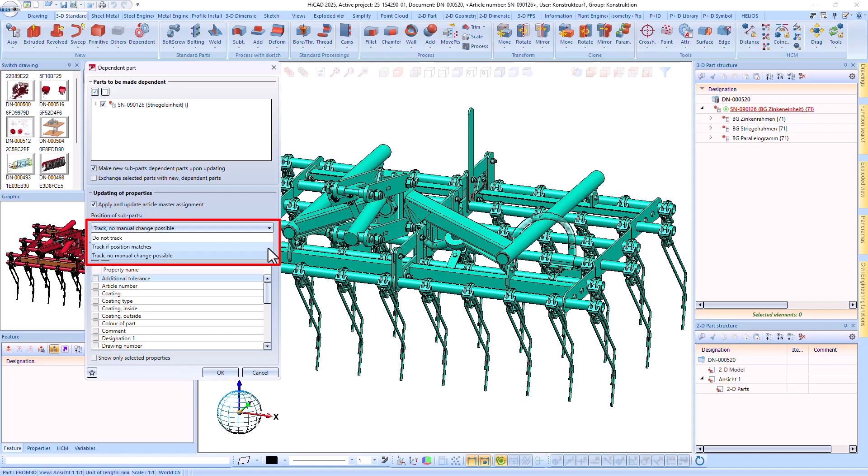When working with dependent parts from assemblies, the previous option track geometrical position of subparts has been extended. In addition to the familiar options, do not track and track if position matches, there is now a new setting, track, no manual change possible. This ensures that the subparts remain in their position and are reset if required when a manual change is attempted.

Previously, it was also possible to change the part structure of dependent assemblies. These changes are now generally prevented.

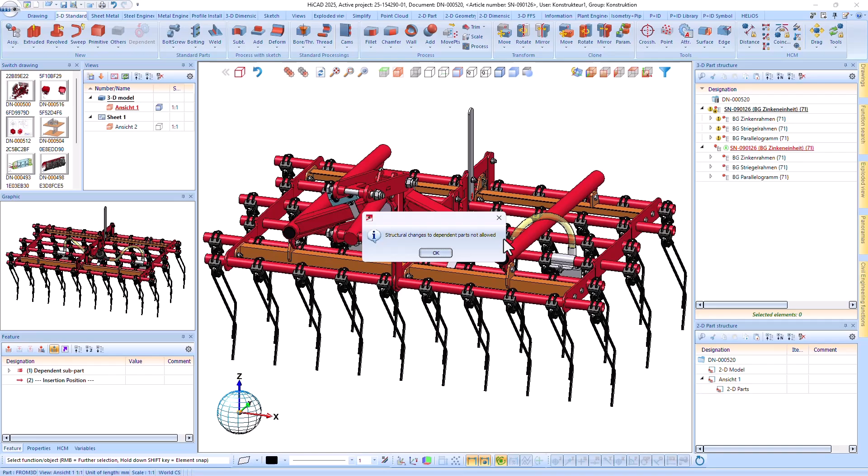A highlight in this service pack is the revised beam lengthening function. With the new interface, which is designed similarly to the lengthen sheet function, you have all the editing options in one place.

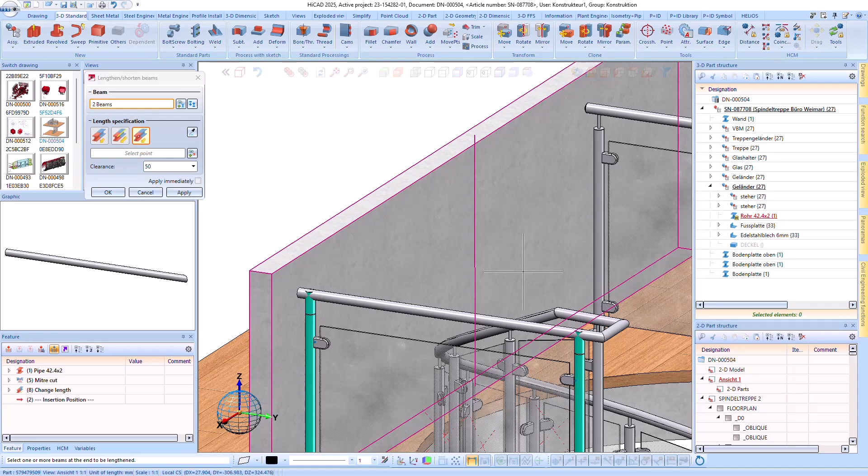Importantly, you can now change multiple beams at the same time, regardless of the type and endpoint of the beam. In addition, the pipette symbol can be used to pick the total length of another beam and apply it to other beams.

Another highlight concerns the standard processings. Here, it is now possible to create countersinks as blind holes. This expands the options for creating stepped bores more easily.

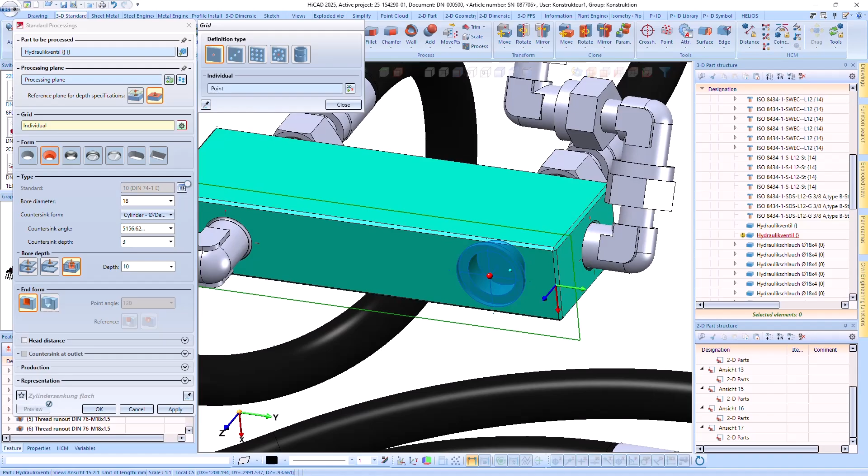There is also an adjustable countersink as edge processing for bores and countersinks.

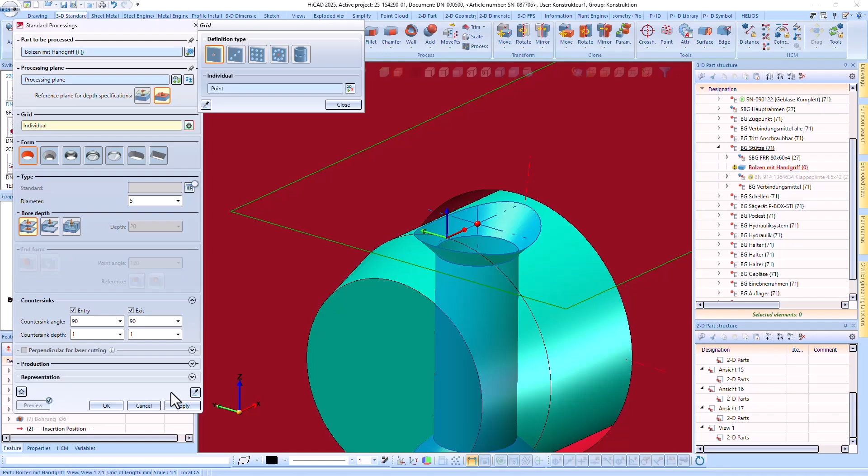Two pipette symbols are new in the dialog. One allows you to transfer bore data, the other allows you to transfer the grid.

Furthermore, the insertion point is now displayed in a grid, like what you are familiar with when working with sketches. As in other functions, you can now select omissions in the grid so that these bores are not created. The list can be inverted using a checkbox.

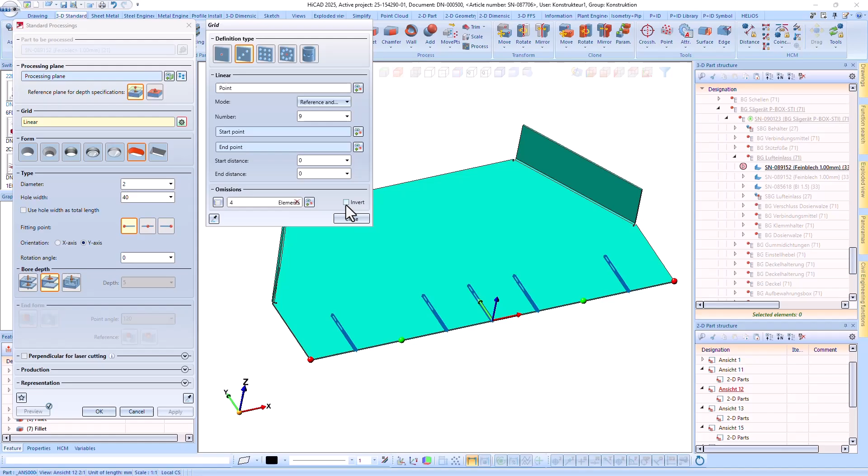Favorites management and other minor improvements are also part of this update.

The manufacturability check for sheet metal parts has also been extended. It now checks flanges for minimum length, bores for minimum diameter, the distance between processings and the minimum bend radius. In addition, an automatic function can be set to determine when the tests are to be carried out.

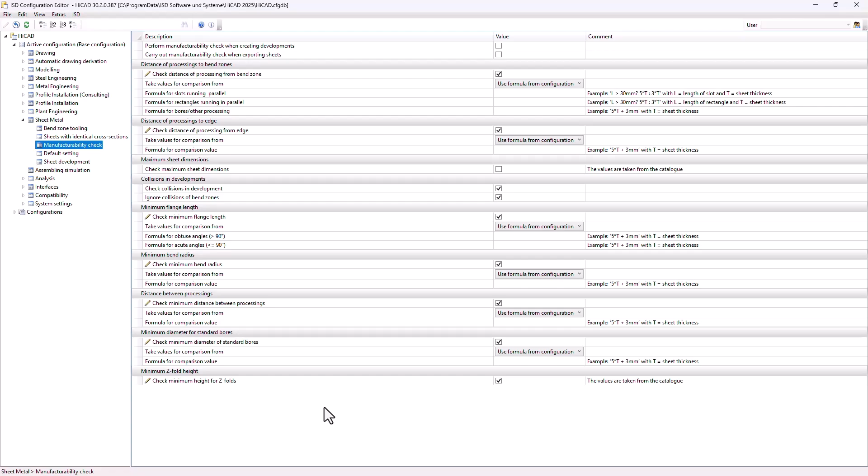Some checks can now also be applied to steel engineering plates.

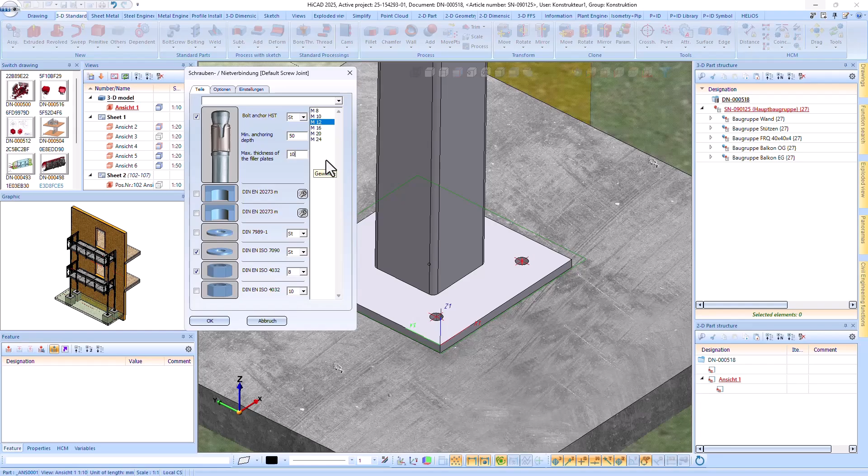In the bolting dialog, a minimum anchorage depth and a maximum thickness of the filler plates can now be set for the insertion of anchors. This solves previous problems such as incorrect selection of the anchor or collisions with cap nuts. Accordingly, the correct length from the catalog is now used and improved placement of the anchors during insertion is ensured.

There is a new column in the attribute management for describing attributes in the configuration. You can also create a description there directly in multiple languages. This description is then displayed in the text editor, for example.

Furthermore, the reference settings for attributes have been integrated into the attribute management. Previously, there was a separate location for this, but now the familiar options can be found in a new column directly in the attributes management.